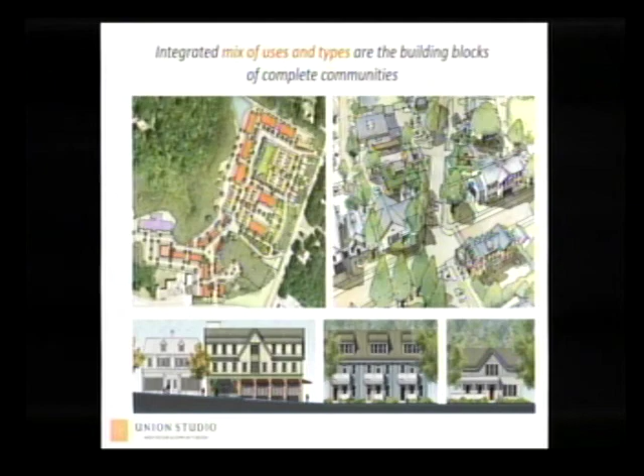Some of these principles close to our heart are along the lines of what I was speaking with the chairman about earlier: walkable and pedestrian-friendly places, a mix of housing types that can meet a broad cross-section of the community, public spaces and amenities, contextual architectural design, and equitable access to amenities. An integrated mix of uses and types are the building blocks is really the framework and cornerstone of a complete community place.

I think that's why the Davis Straits area is such a focus for you when you look through the historic core of your community. We've been very fortunate over the last decade or so to have done a fair number of projects out on the Cape, both planning and architecture.

These are a couple of projects we've done recently: a large planning project in Sandwich, two of them actually, and this was a competition we recently won with the Cape Cod Young Professionals group for a small housing option and prototype for young professionals on the Cape.

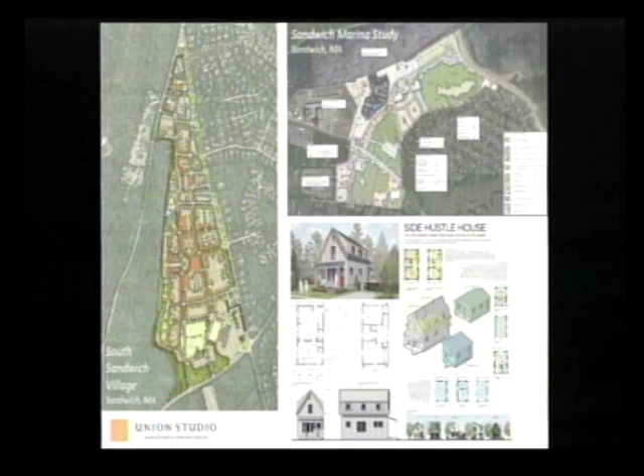So why are we here? Basically, we're here to begin a conversation. This is the very beginning of a project that's going to go on through the remainder of the summer and into the fall, around strategies and techniques for meeting this increasing housing demand on the Cape.

We want to get your input on ways to do this that will really enhance and support the character of your community—I think that's a critical piece of the puzzle. We're really at the beginning. This is just the start of a discussion on this topic, and it will continue through the summer, hopefully with a robust online visual preference survey. We'll present progress at the One Cape Summit, and then in the fall there will be a second set of presentations back to the community where we'll talk about what we've come up with after receiving all of this input.

So we're beginning with three communities, of which Falmouth is one, and we hope that we'll be able to add a few other communities into this study. One of the reasons these communities have been chosen is that they represent conditions that, when we develop techniques for these places, will have applicability across the Cape as a whole. Another reason is that all of these communities have recently completed studies identifying both the need and places where alternative housing strategies would be appropriate.

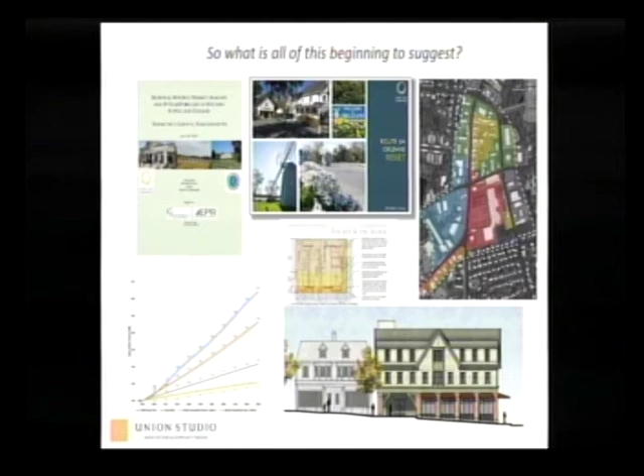But all of this is beginning to suggest that we need to have a discussion about density, which people tend to think is a scary thing. I think what our presentation is going to discuss is that there are ways to talk about density that aren't really scary, and I think all of us getting our heads around how to do that is the immediate challenge, and then showing everyone, the community, and you what that means is the next challenge.

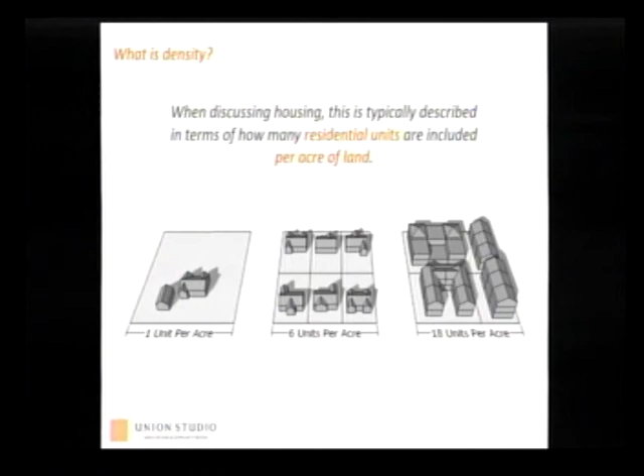But that density can take many forms. This is a project we worked on in East Greenwich, Rhode Island. This lot sits in one of those transitional areas that Douglas was describing. We don't give you much context, but here's the back of a commercial building, here's the commercial parking lot, and without much context, this literally jumps right into single-family residential fabric.

This was an empty lot zoned for multifamily. The town knew it needed some multifamily housing. If you looked at the code and played out the way it was expected to unfold, you would have ended up with a single 15-unit multifamily building put right in the middle of the lot, buffered as far as possible from everyone around it. And by the way, this doesn't really look like anything around it. We thought there's got to be a better way.

So the solution was to take that same number of units and instead of consolidating them, spread them out. On the same parcel of land, instead of 15 apartments, we did 15 small cottages. So you end up with the same density—both of these are 20 units to the acre, on less than an acre of lot. We consolidated the parking, there was a little greenway through the middle, and a lot of clever things we had to do. But the net result was the same density in two very different forms.

In this case, with these small cottages, especially since the majority of them are set back off the street, as you're going up and down the street you might not even have noticed—it just looks like a few more single-family houses have been built there. So again, the raw number of 20 units to the acre wasn't really the issue at hand. It's really the form that density takes.

So now I'm going to ask you guys—we're going to do a little quiz for a couple of slides. I'll show you two images and ask which one you think has the higher density. We'll do it with an informal show of hands. Who in the room thinks the image on the right is the higher density in this case? Any takers? Got one? I know the owner, so—you already know the answer on this one?

That's right, so it looks like everybody's going to show a hand for the image on the left. Yeah, a lot of people, okay, good for all of you.

This building here has 5 units inside of it, and it's on a half-acre lot, which means it's 10 units to the acre. Whereas this house on the right, we're just calling this a typical single-family home in Cape Cod, because once you get outside of these core study areas, pretty universally you find quarter-acre, half-acre lots, which means a density of roughly 2 to 4 units per acre. So what we're contending is you could be driving down the street, go right by this house, go right by this house, and you wouldn't blink at the fact that the density just got 5 times higher going down to the next lot.

All right, so now you know this one's doing pretty good. What do you think compared to this set of townhouses here? Who thinks the townhouses are the higher density in this case? 1, 2, 3, 4, 5, 6, 7, 8, 9.

And what about the image on the left? Who thinks that house is still winning out on the density? Pretty much everybody else, one hand? A lot of people choosing not to vote. We're not keeping track, I'm not writing down the names.

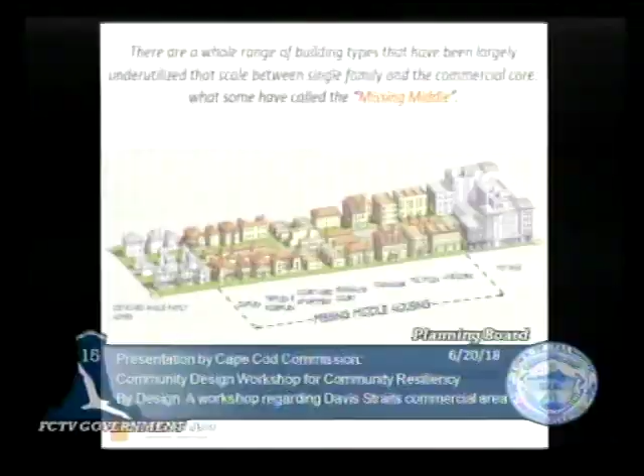So what are some creative approaches to moderate and transitional density? As a reminder, it's really these areas that we're here to talk about tonight. We're not worried about what would go in these single family areas. It's really these areas that have been identified as places where we want to find creative ways of getting some more density, more options for folks, different housing options, these transitional areas, if you will. The good news is there's a whole range of building types built historically that fall somewhere between detached single-family homes.

In this case, the graphic shows a mid-rise apartment building, but you could just as likely think of that as your staples. There are all these types, and we're going to talk about a great number of these, but they help you slowly transition to a slightly more dense form, so you can find the right place for each of these things in any given scenario.

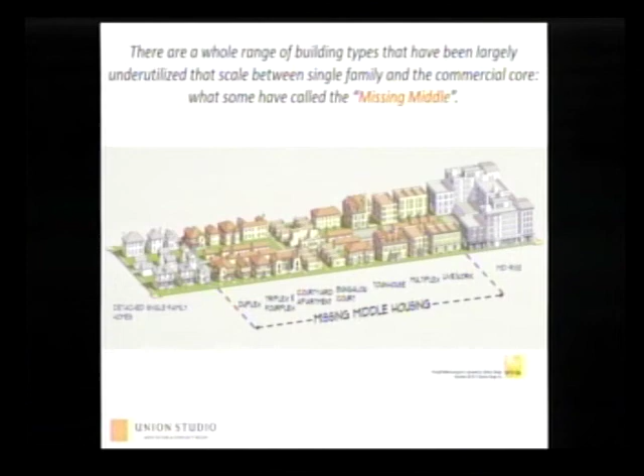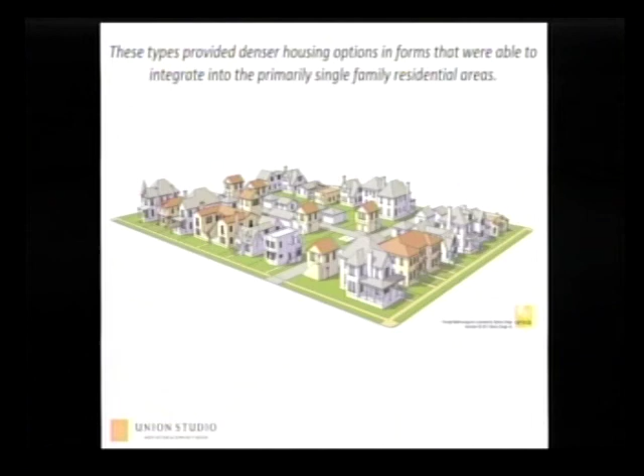These housing types were common in pre-1940s walkable neighborhoods. They provided denser housing options in forms that integrated nicely into a single-family community. That could be a little building with 6 units sitting right next to 2 single-family homes. This was a prevalent strategy back in the day for infilling or retrofitting—say the new train line came through and suddenly more people wanted to live there. Instead of wiping everything out, you could infill, and I think that's one of the strategies we'd want to consider here as well.

Why is the missing middle missing? First and foremost, most zoning ordinances were rewritten post-World War II, and they focused primarily on single-family homes and apartments. You either bought and lived in a house or you rented your apartment, and there really wasn't anything in between. We liked to really simplify things back in the day. As a result, financing was structured largely based on those two types, and it sort of continues to be that way to this day.

In addition, local residents tend to be hesitant about new types of development. After a while, we got used to seeing those two things, so if you propose something that's a little bit different, you get a lot of resistance a lot of times.

So why is there a renewed interest in the missing middle now? I think we made reference earlier to the fact that empty nesters and young professionals are really looking for new options in historic quarters, areas where we have limited land. We don't have the ability to do big-scale projects, so you're looking to infill in creative ways.

We're looking for new models to help provide more affordable housing. The industry is looking for new ways to develop in smaller increments. After the crash in 2009, it got a lot harder to find financing to do a 400-unit project. Plus, most developers didn't want to get involved in a project that was going to take them 10 years. So everybody's looking for this smaller-scale, incremental approach to providing new housing.

There's also been a big demographic shift toward right-sized units and communal living. Those empty nesters and young professionals aren't looking for the 4,000 square foot house, at least not at the life stage they're at now. And there aren't a lot of options for them other than those large single-family homes. All of these things are things that these missing middle typologies can help address.

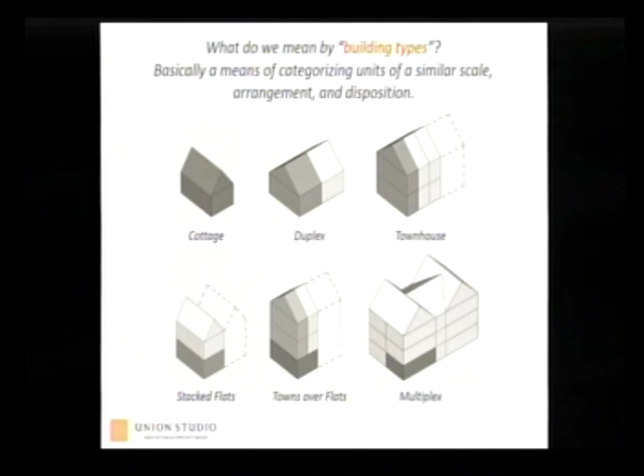The last one is what we call a multiplex, which is effectively a very small multifamily building. The idea is that you could have a shared central circulation feeding a couple of units on either side of it. This is a very efficient building to build—you build one stair that feeds a few units. It's not the big building with corridors going down and three sets of stairs and an elevator in the middle. So again, it's a more incremental way of thinking about providing housing.

So let's go through those each one at a time quickly. Cottages are small-scale, single-family detached units. They're typically 1 to 2 stories. They may be attached, but they're typically not. Typically, they're detached. The real advantage to getting the density here is arranging them in what we'll call cottage

courts, and we'll show you some examples of those. One of those is here, the image that Douglas showed earlier. This is Heritage Sands in Dennisport. So these are a series of cottages, obviously arranged pretty closely together. You gotta be clever about how you do that, but you can really get some pretty good densities out of

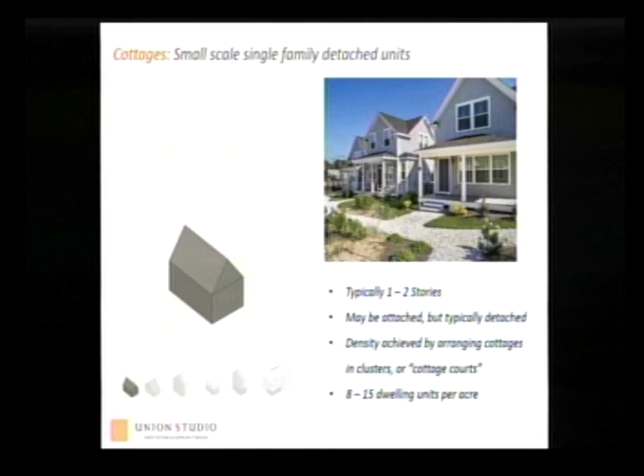those small cottages. The examples we found on the Cape ranged anywhere from 8 to 15 dwelling units per acre. There are examples of these, like the one in East Greenwich, that was closer to 20. So obviously those numbers aren't set in stone, but that's what we found when we did our sort

of analysis of examples, the ones we could find on the Cape. So with each of these types, we're going to share 2 examples that we found just for some context. Chase's Ocean Grove, Old Wharf Road in Dennisport. So obviously these are vacation cottages. Most of us probably wouldn't feel comfortable living in quite those close quarters. But in that roughly 4-acre site, there's 55 cottages, so that's 15 units to the acre.

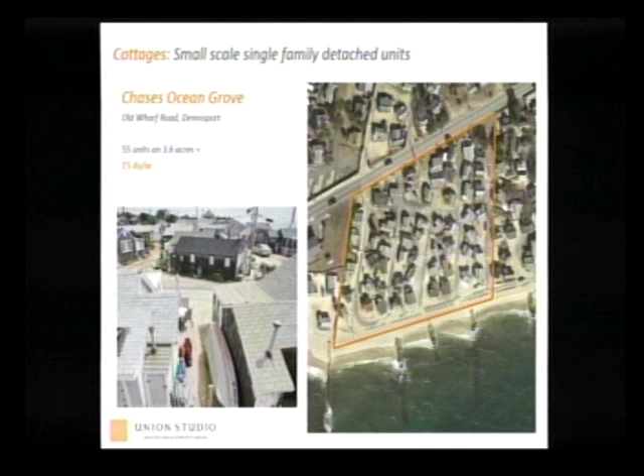Again, we're talking about something in contrast to the 2 to 4 units per acre that the single-family housing we've typically built could provide. Now, the reality is when you probably build this in current day with current day standards and needs, like a place to park maybe 1 or 2 cars, this is the Heritage Sands project. And so in 8 acres, we have 64 units.

So again, the density got cut in half, or 8 units to the acre. But again, that's still 2 to 4 times as dense as what the typical single-family arrangement might provide. And I know it's very difficult to make out on this slide, but the way this works out is you have about a dozen cottages facing in together in one of these little shared green spaces before you transition to the next one, and they're in their own little cluster. So what's actually nice is this is a series of smaller communities within a bigger community, and they're all interconnected. But again, this is one of the strategies that we might avail ourselves to.

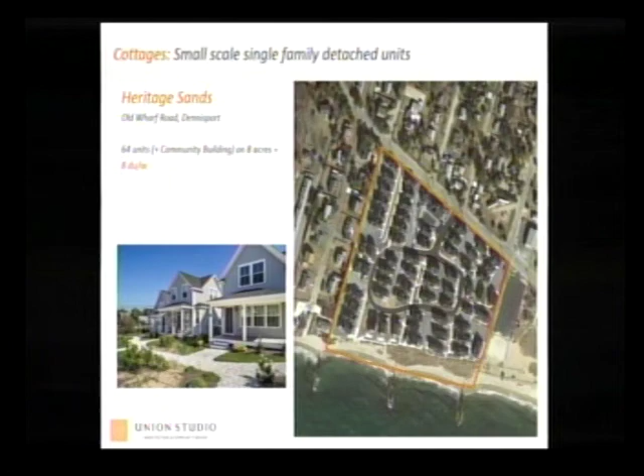And because some of these examples on the Cape aren't necessarily the best versions, I think the cottages ones are really good, but you'll see in some of the latter ones that we had a hard time finding particularly inspirational versions of the things we wanted to talk about. We also just wanted to point out that these things were prevalent once upon a time. There are new ones and old ones around the Cape, maybe in Rhode Island, maybe you have to look a little further, but they were prevalent. You can find these things in New England.

And so, again, we're going to do 2 comparisons here. We're going to get your guys' thoughts. That's what we're really here to do tonight, is to spark a little conversation and get your input. So what we're going to do is this visual preference survey. We're going to put 2 images up. They might look largely similar, but we actually think there are some subtle differences between these. We're going to ask you guys to vote which of the 2 versions you think would feel more appropriate here. So assuming you were going to use one of these 2 in the study area, the Davis Straits area, as a potential solution, which one do you think might feel more appropriate?

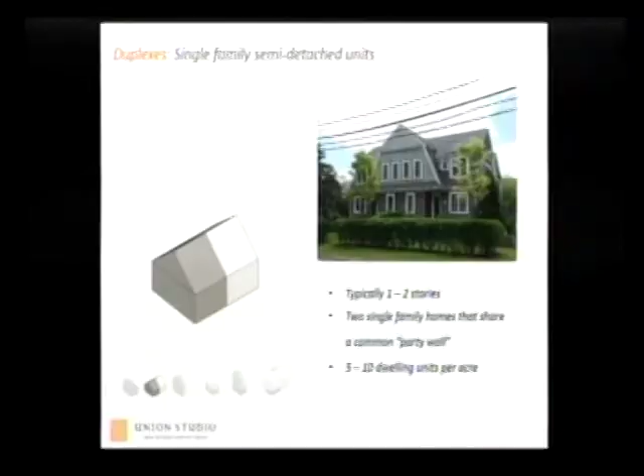Right. All right, well, let's keep moving because we've got a few more of these to get through. So the next one is the duplex. Again, I think most of you know what a duplex is. They're typically one to two stories. It's two single-family homes that share what we call a party wall, which makes it sound really fun to share a home with somebody.

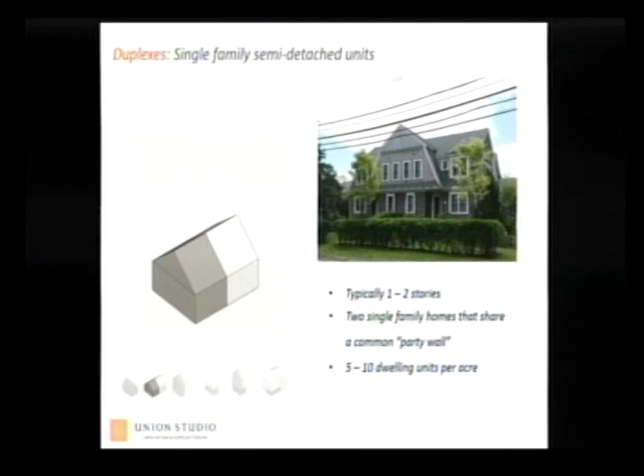And these came in, the examples we found were in the 5 to 10 dwelling units per acre range, the ones that we were finding around the Cape. But obviously there's probably a great many examples of these.

So the point you made earlier, when you look at this thing in an aerial, this is the Beechwood condos. You can see this is a very suburban arrangement, right? These things are surrounded by a lot of space. They've got these big 20-foot buffers probably on the side and back, nice little green space in the front. But they also were in a context where they really weren't trying to necessarily fit in with their neighborhood. There wasn't much of a neighborhood to fit into. And the resulting density was 5 units per acre.

And then if we compare that to the other image we shared with you guys, Old Dock Road in West Falmouth, you can see they were basically 3 buildings. There's 3 duplex buildings that sit on this barely 1 acre lot, with 5-yard setbacks. But that's the appropriate thing to do in this particular context. So it really did probably have less to do with the buildings themselves and more about the way that they were arranged and arrayed upon the site.

And again, a couple more examples of duplexes around the Cape, a couple from a few other locations as well. This was our project, a 40B project actually in Brewster that we showed earlier. So we had a handful of duplexes in the mix there as well.

So let's go with these 2 images. Again, when we're talking about the Davis Straits area here in Falmouth, 2 very different images here. Who would select the image on the left being more appropriate in the Davis Straits area of Falmouth? 1, 2, 3, 4, 5, 6, 7, 8, we'll call it 9. How about the image on the right? Who's going for the image on the right?

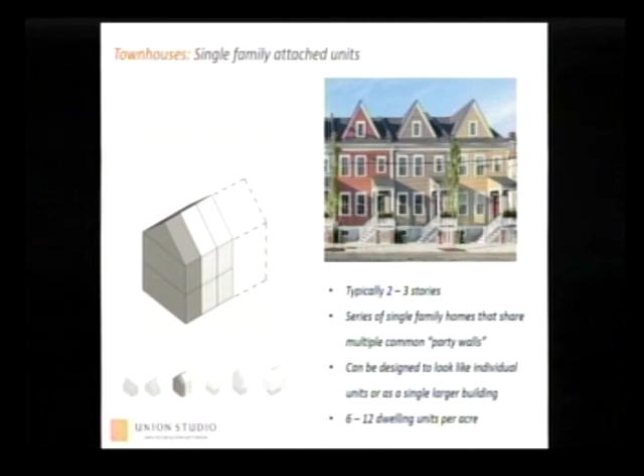This is the density starting to get a little bit higher, 6 to 12 units to the acre for the versions we found on the Cape. Again, in other parts of the country you can get up to 20 units per acre on townhouses and still have them feel pretty good. It also depends on what kind of townhouse it is. We're not going that deep here today, but it's another type we wanted to talk about.

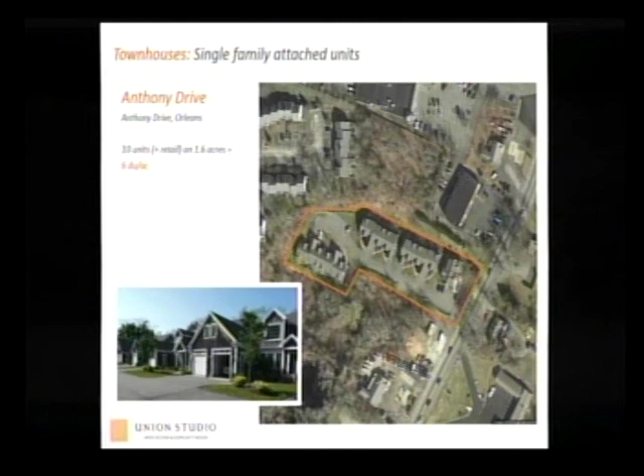One example is in Orleans, Anthony Drive. There are 10 units plus a little bit of retail at the front end, so it's starting to be a mixed type community on 1.6 acres, 6 units to the acre. This has the same problem as the image we talked about a minute ago, a lot of front-loaded garages. They really detract from the sense of community, although the buildings themselves are pretty nicely detailed.

Now Bayberry Village, one of the other images we showed earlier. 42 units on 4 acres, so that's 10 units to the acre. Again, a very suburban arrangement. This whole staggering of the townhouses is a very suburban treatment as well, so I don't think that would necessarily be appropriate for the Davis Straits area. But these were some of the examples of townhouses we found on the Cape to help us get a sense of what people might be more used to here.

Here are several examples of townhouses in other locations. You can see that's a series of 4 townhouses, but in a composition that looks more like one single building, versus one where you're stepping things or changing materials to make them different. There are different contexts where those different approaches make sense, so there's a couple of different ways to take these.

Two images to get your thoughts on. Here are 2 variations for the Davis Straits area. Who would say the image on the right feels more appropriate? 1, 2, 3, 4, 5, 6, 7, 8 - 8 or 9. How about the image on the left? 1, 2, 3.

Why did folks choose the image on the right? The one on the left looks like a country estate sitting on 5 acres. That's a fair point. Most townhomes are sold versus rented, and I've always believed that when people go home, whether rental or buying, they want to feel like they're going into their home. I think that individuality of those townhomes is much more marketable than the big building. Anybody else want to offer a thought?

All right, let's move on to the stacked flats. Again, this is the notion of stacking single-story units on top of each other. This is that example that's literally around the corner from here, typically 2 to 3 stories, which is to say typically 2 to 3 units for one of these configurations. But what we try to show here is you could be a standalone version like this, or there are examples where you can attach a couple of those, just like you would townhouses, and get more units in a single building.

10 to 15 units per acre, and typically for these we find they may have independent circulation. It's hard to make out in this image, but the first floor unit actually has its own set of steps and a front door, whereas the second story unit has a stair on the side that you could go up and get into the second story unit there. So each person would have their own front door and could have their own address, which is kind of charming and nice.

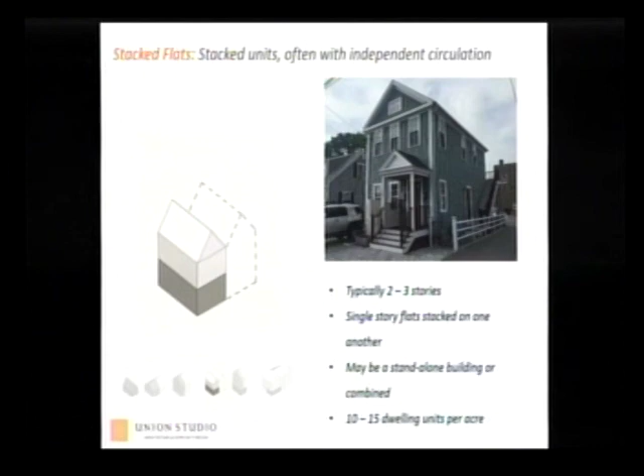The two examples we wanted to share: one is the Captain Hamlin House in West Falmouth. This is a 1-acre lot. There was a historic home on the front and what we think was probably some sort of barn or outbuilding in the back. Someone converted that to 9 units on a single acre. So again, 9 units to the acre, but you drive by this all day long and never realize there were that many units in there.

And then the example that's here around the corner. So here's the green right in front of us, and it's a town hall somewhere here-ish in the site plan. There's one building here, another building here, and they both have 2 units. This little guy has 5 mailboxes on it, so we're wondering, are there really 5 units in that building? There may be, but this is also the Oddfellow Hall behind here. We were translating this to be 9 units in roughly 0.4 acres, which is why it's probably around 22 units to the acre. If we don't buy that there's 5 units fitting in that building, imagine it's another 2 units there—the adjusted density is probably around 15.

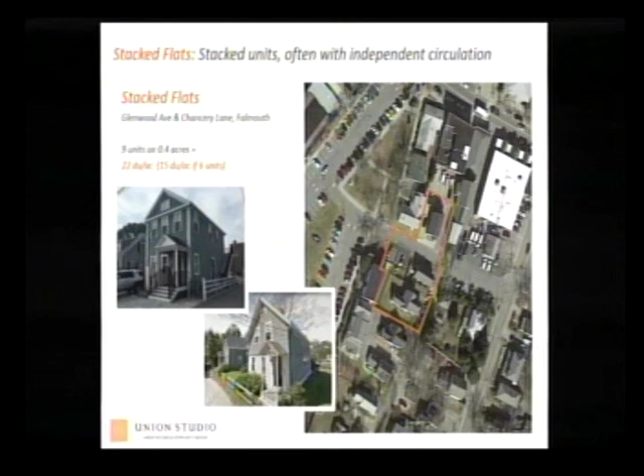But again, compare that to 2 to 4 units in a typical single-family context. And again, examples of these in other places—sometimes they can really be made to look like a little carriage house or outbuilding, a converted house here, something a little more urban and vertical there. So these can take many shapes, sizes, and forms, and can look like they belong in a variety of contexts.

So we're going to ask the question again: who thinks the image on the right, which is in Falmouth, is the more appropriate version to put in the Davis Straits area? And that doesn't mean that's the right answer—I shouldn't have led it that way. One, two, three... up to thirteen. Okay, how about the image on the left? Is anybody in support of the image on the left?

I think that it's going to have to be an eclectic mix. That whole area is going to be a lot of different stuff. Like Sharon said, it's going to take a lot of diversity in order to make it work.

Are we worried about a 3-story scale? Is a 3-story scale reasonable in the Davis Straits area? I think so, in the middle part of it. In the middle, maybe not at the edge. Kind of like garden units on the streets, some of them, depending on how it's done. It has to go up and down.

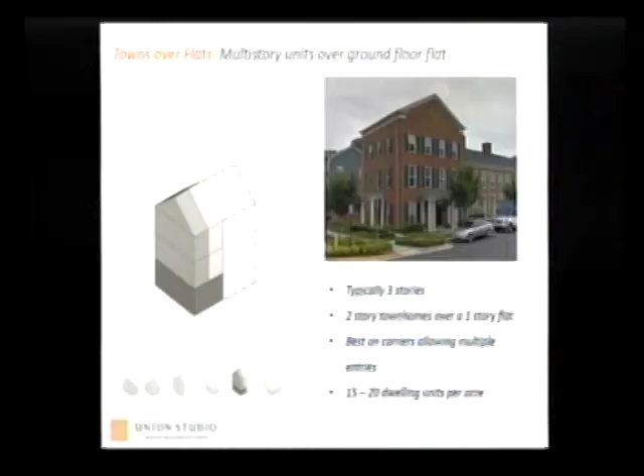Okay, we've got 2 more of these to go, so I'll move a little quicker. Towns over flats—again, this is an example from Virginia, so we haven't found a lot of good examples of these on the Cape, if any. This one we don't think is necessarily appropriate here, but it's the clearest diagrammatic version of one of these things. What's clever is because it sits on a corner, you can have one door on the side that's the entry to the flat downstairs, and on the front a pair of doors that take you to a stair leading upstairs, with a townhouse on the right and a townhouse on the left.

So this building actually has 3 units: the upstairs two 2-story units, and then a flat on the ground floor. This also shows how it fit nicely into what was otherwise a townhouse neighborhood. These are typically 3 stories because the townhouse itself has to be at least 2 stories, and this is a flat below.

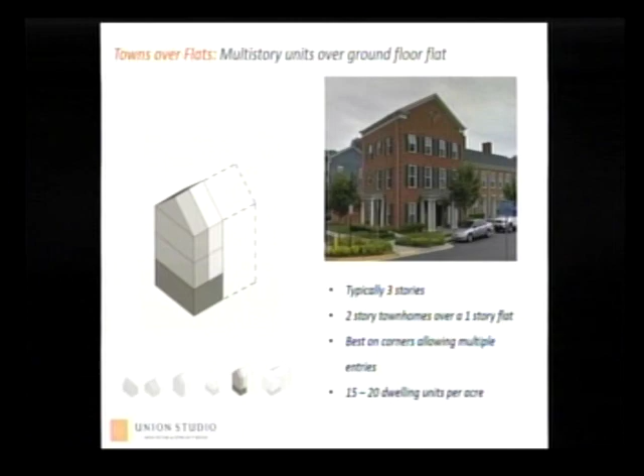Best on the corner for the multiple entries. But look at the density, right? So now we're starting to get up to like 15 to 20 units per acre. The density is starting to get up there, comparable with a big mid-rise building, but in a compact form that might fit nicely between other things in a particular area.

Sir, if we were to change our height regulations to do something like that, what is the height of that building? I would guess this building is probably 30 feet to about here, and then depending on how you measure the ridge, this one was probably about 35 to the midpoint of the ridge, call it 40 to the top of the ridge.

40, so it's 5 feet higher than we currently have now. And a full story—we're at 2.5 stories, that's 3.5 stories now. Yeah, and if you have floodplain in Davis Straits, that's going to impact things even further, right? So if we have to start at 10, and I can only go to 35, right? Yeah, so, yeah.

So here's a couple of examples. We found in Provincetown this one, which is really more like a cottage over a studio apartment, but it's starting to be this idea of 1.5 stories over a single flat. In Providence, a few examples where there's a door for a flat downstairs and a door that takes you upstairs to a 2-story unit above. And this is that project Douglas was talking about that we're working on in Hyannis.

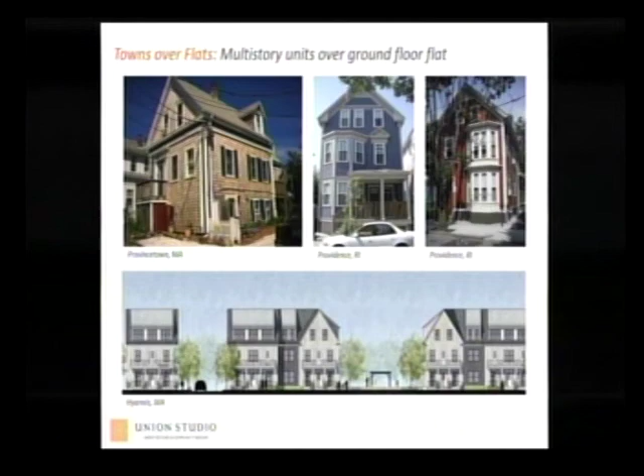Technically, none of these are a townhouse over a flat, but you could really see these as being that. So it's an example of the form being more important than what's really behind it. Those are actually a series of stacked flats. We wanted to try to find another image that could represent this building type we're trying to share today.

So again, we'll do a quick show of hands. How about the image on the left being more appropriate for Falmouth Davis Straits? 1, 2, 3. How about the image on the right? 1, 2, 3, 4. We're starting to get into territory where people don't want to vote. Okay, so a number of people not wanting to vote on this one.

This one's tricky because this doesn't feel anything like the Cape in terms of its character. And this one feels a little scrappy—it even looks like it's starting to sink into the ground back here. So this is kind of a tough one. But again, this was a unit type we think has merit, though we're having a hard time finding precedent for it here. We have a bank on our East Main Street built just a few years ago that looks a little bit like that.

More natural. Do we think there's an opportunity for brick in Falmouth? I think we can make some, limit it a bit. Yeah, if you look, you find it. Like you don't imagine it, but you look, you find it.

Mixtures of it. So the last of the missing middle types we wanted to talk about today is the multiplex. This example is actually a mixed-use building, but it fits neatly into the diagram: imagine a front door here in the middle you could go in, with 1 or 2 units on either side. You go up the stairs, there's a few more units, you keep going up. These are typically 2 to 3 stories, anywhere from 4 to 12 units per building.

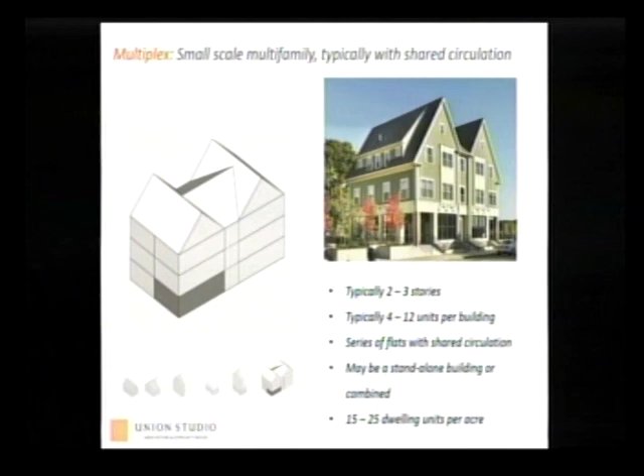There's a provision in the building code that if you're going to do that single central stair, the most you can do is 12 units, and the most you can do is 4 per floor on 3 floors. There's a logical code restraint there for not going past 12.

But you can also find examples where maybe there's 1 unit on the left, 1 unit on the right, and the stair only goes up 1 floor, and that's why it might be only 4 units. So these things kind of shrink or grow anywhere in that 4 to 12 unit range.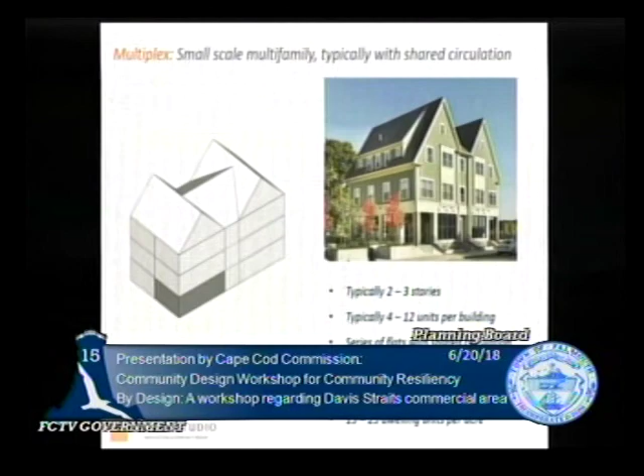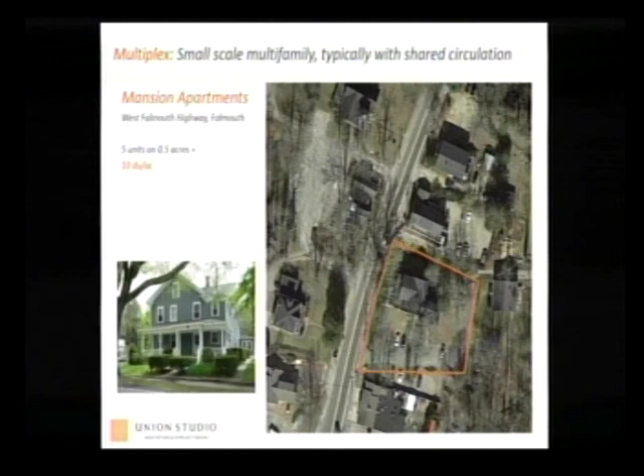In the examples we found on the Cape, that's 15 to 25 units per acre. Again, these are legitimately multifamily buildings, just a very small scale multifamily building. The one we shared at the very beginning had 5 units in that single structure, so 10 units per acre as a result. You can see it didn't even use a lot of the land it had around it, which is probably why it fits nicely into its surroundings.

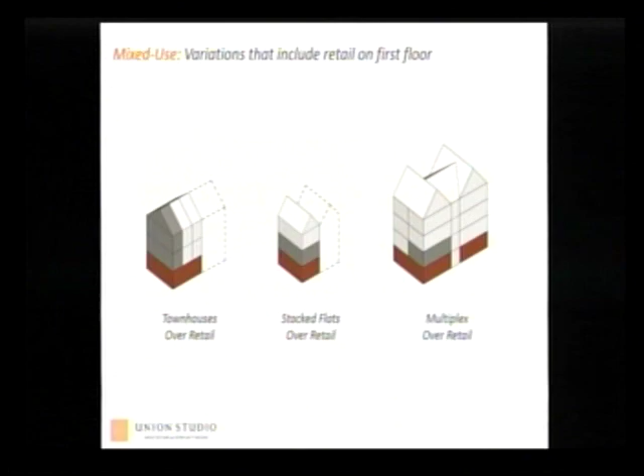This is also a very different conversation in Eastham, again, one of the other study areas that we've been talking about. Route 6 is going right through the area that they're talking about trying to make their core. That's a 4-lane highway right through the middle of there. So the context of Route 28 compared to Route 6, since we're thinking about all of these different conditions, we need to come up with clever solutions for all of those conditions.

Conventional zoning really just looks at dimensions, and that's it. It says your building can be this tall, it has to be this far back from the street, this far back from your side yards, and here's your density allotment—anything that you can put in there is what's allowable in the community.

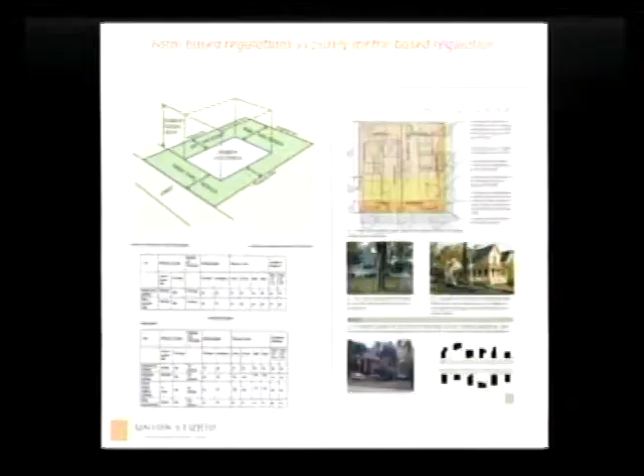A form-based code takes the opposite tack. It asks what you want your community to feel like, and lets all of that other stuff become secondary. These kinds of codes are based on community input and analysis—it takes a fair amount of effort, but they're based on understanding your context. This happened to be a form-based code we worked on in a community in Rhode Island, where we spent a good deal of time documenting the context of the community and using that as a basis for the form-based regulation.

That translates into a series of code and regulatory tools that your boards and community can use to help incentivize the kind of development you'd like to see, to preserve and enhance the character of your community. So it's a bit of a plug—I think at the end of this we'll begin outlining a framework for what a form-based design guideline or regulation could be. It's an important piece of the puzzle when imagining the character of the community over the long term, particularly in the Davis Straits area.

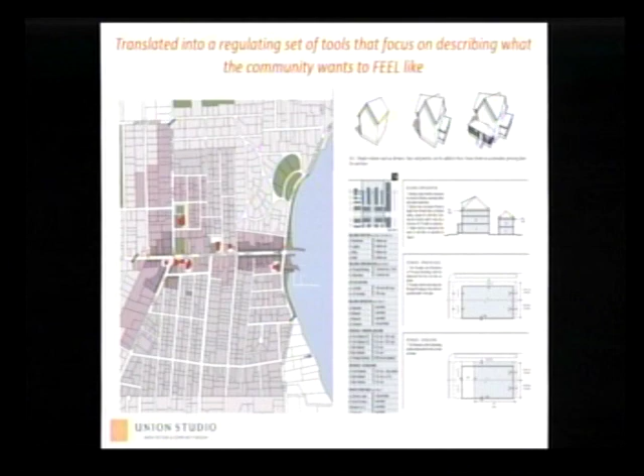Jeremy had one more quick thing, which is what we've really already been talking about all around. As a reminder, when we focus on the Davis Straits area, the penultimate question we were here to ask tonight is could any or all of these options fit into your community? I think there were a few folks who said this might almost be too low a scale in some areas, but we might want to be thoughtful about the cottage scale. And certainly when we got to the upper end, we started to hear a little murmuring, especially when they got bigger and wider, and especially in the mixed use examples. But we wanted to circle back and offer a general opportunity to talk this through a little bit.

Now that we've talked about density, what's really important is the way it looks, not necessarily the numerical value. But have we convinced you that any of these could work here? Are you still strongly opposed to cottages as we talked about it? Or are you thinking this really just doesn't make any sense? We wanted to circle back and have one last chance to talk through these, because it's not that we were necessarily suggesting all of these make sense here. It may be that only a limited number of them do, or maybe it's better to have a bunch of options. But this is what we wanted to throw out as one final question for the group to discuss.

My anticipation would be that you'd have nicer architecture and more higher end, more expensive units on the periphery, and then larger, simpler buildings in the middle where you could really increase the density, as Mike was saying, with micro units and simple architecture that can be really affordable. We really need some affordable units if they can be squeezed in there and not be really in our face. So having a range of options lets you do a range of price points.